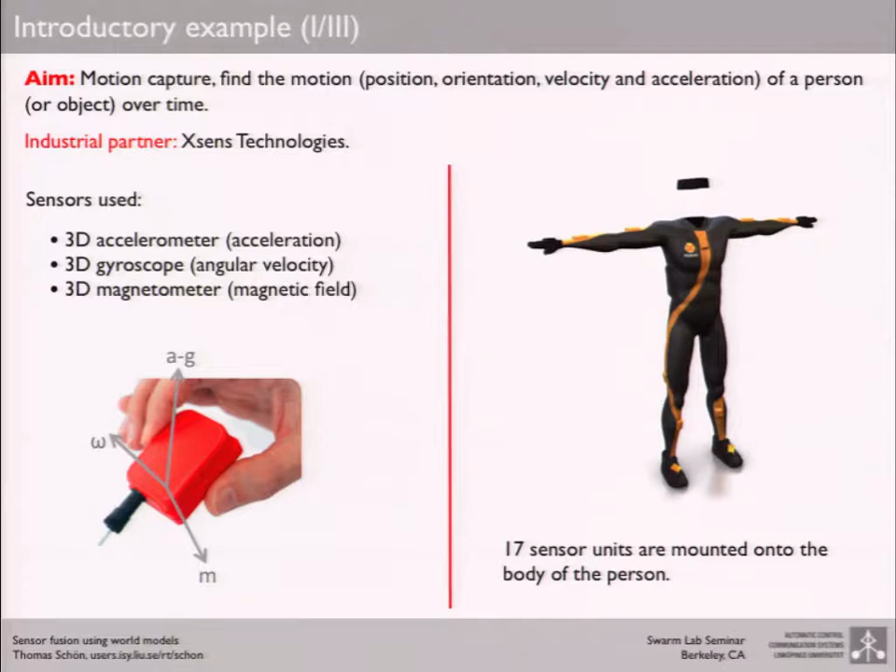Well, if you start and try simple things first, as you should always do, you only make use of the inertial information. We're not using any more elaborate models. I use this as a tool to show you that models are quite useful. It's going to be a very simple world model in this example. I'll give you a few more interesting examples later on.

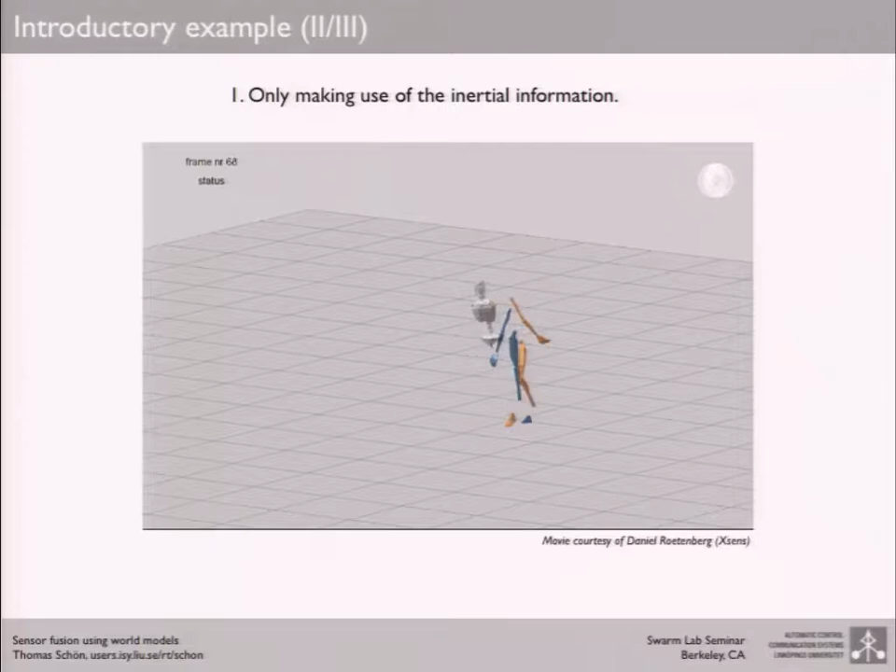So this is what happens if you, well, it's actually not what happened to this person, but this is what happens if I just use the inertial information and just try to do my best at figuring out what happens. Let's see how we can do this better, because we have quite a lot of knowledge of this system. In fact, you're all this system. I mean, you have a body, so you know that your hand is attached to your arm, there's an elbow and an upper arm and so on and so forth.

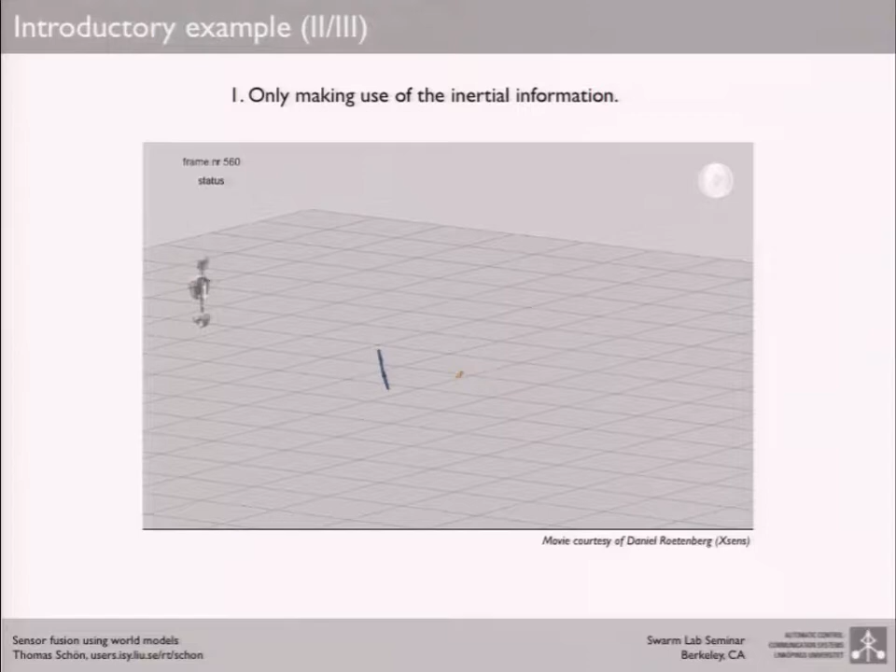So let's use that. We make use of a biomechanical model, just explaining that, and see what happens. So we now have the inertial sensors and biomechanical model. Okay, so it starts moving around. At least he's not exploding, so that is good. However, he is sinking through the ground, so that is still a problem. And why is that happening?

Well, the inertial sensor is a relative sensor. It gives you no absolute information whatsoever. And these are, as was discussed earlier, they cost a bit, but they are still considered cheap if you compare to military-grade sensors. That means they will drift pretty quickly, as you just saw. So how can we fix that?

Well, we know that I'm walking on a floor here, so I will probably not sink through to the other floor. So let's include that in our model as well. That serves as a very simple first world model. It's just a flat ground. We do that by detecting when you have zero velocity, because when you're walking there's zero velocity at certain points. Well, that's a lot of information that can be used.

So we use that together with the world model, and now it's looking better when it's moving around. You don't see the absolute position here. So this is actually not perfect either. I mean, to your eye, this looks beautiful because that's probably what happens. But the position will still drift off on the surface here.

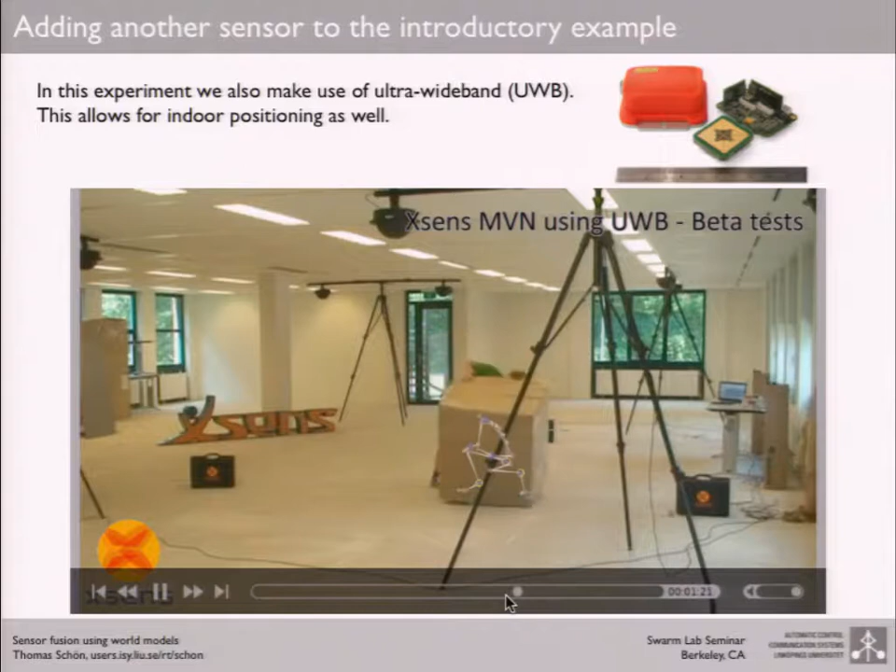Okay, so that was just to get started to show what type of problems we're talking about in a very simple setting here. So what's this? This is what I refer to as sensor fusion. So that means you have multiple data coming in. Here, it's not too much, but still a fair bit. You have 17 units, each reporting 9 signals, 17 times 9. The inertial sensor is coming at 200 hertz here, I think. So it's a fair data stream that comes in that you need to do something clever with.

And then you need a systematic way of processing that. So what I showed you here, I hope I showed you that making use of models for doing this makes lots of sense, as you all know. So again, sensor fusion, trying to define that, I'll say it's the process of using information from several different sensors to find out what's going on. That typically means, as you saw, dynamical states, so things that change over time, but also possibly static parameters that might be there. So again, you have a bunch of sensors and you have a world model.

The world model we use here was very simple. I'll show you some more interesting ones soon. You need a dynamical model explaining what's happening, the dynamics of the thing. You need a sensor model that explains how the sensor measurements talk to the dynamical model, how your measurements are related to the state. Once you have all that, then you have a bigger or smaller inference problem that you need to solve. So you need an inference algorithm as well.

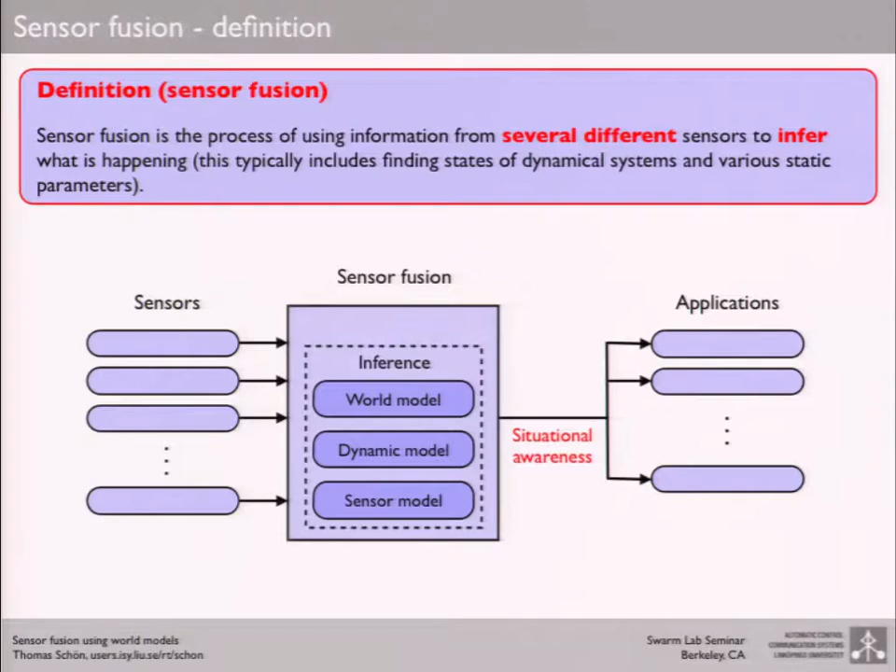Then you hand out some form of situational awareness that you then give to your customer, whatever your customer is. It could be a control system, for example, or in this case, the movie industry is using this, for example. They are happy with just getting the estimate, and then you can overlay Gollum or whoever you want to overlay.

And this, of course, just one example leads to many different questions, such as can you incorporate more sensors? How do you make use of more informative world models? As you know, we're getting better and better world models as we speak now. So how can we use that? How can we solve the inherent inference problem that we're dealing with?

It's a pretty tricky one, actually, in the general case. And quite importantly, can you do this systematically so you don't have to redo the thing all the time? Can you do this on an industrial scale, so to speak?

So before you go on, you may be addressing this, but as for this world model, it seems like this could be a difficult problem because, if it's a spongy floor, for instance, versus a hard concrete floor, is that something you think you could derive automatically from what you're observing? Is it something that comes from a database, or what's the view on that? That could absolutely come from a database, for example.

So I'll show you a bit on fighter aircraft navigation. They use a system like this to navigate. And then you can incorporate, for example, are you flying over terrain which involves lots of vegetation, or is it sea, or is it concrete for that matter? So like you said. And then you can use that in your algorithm.

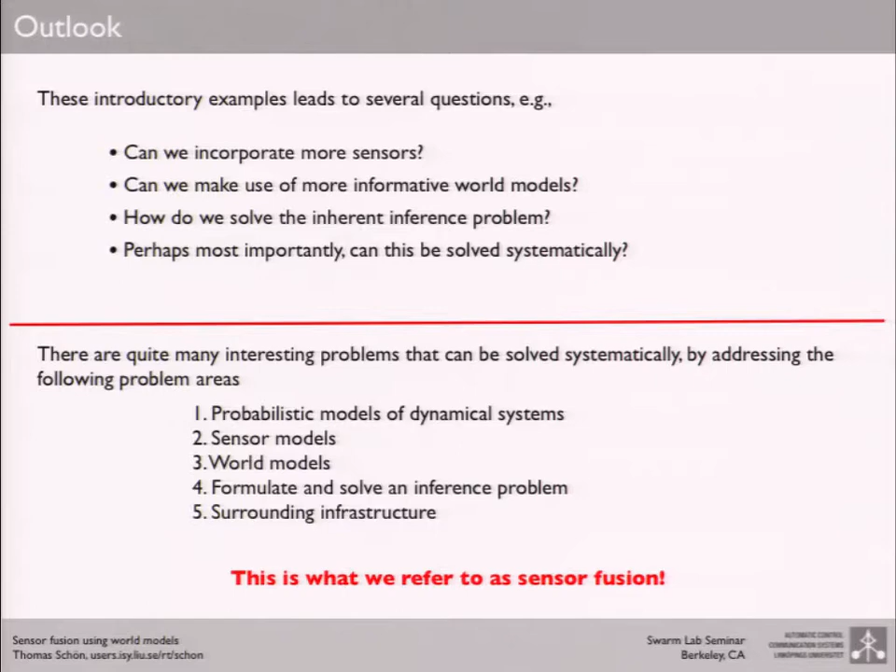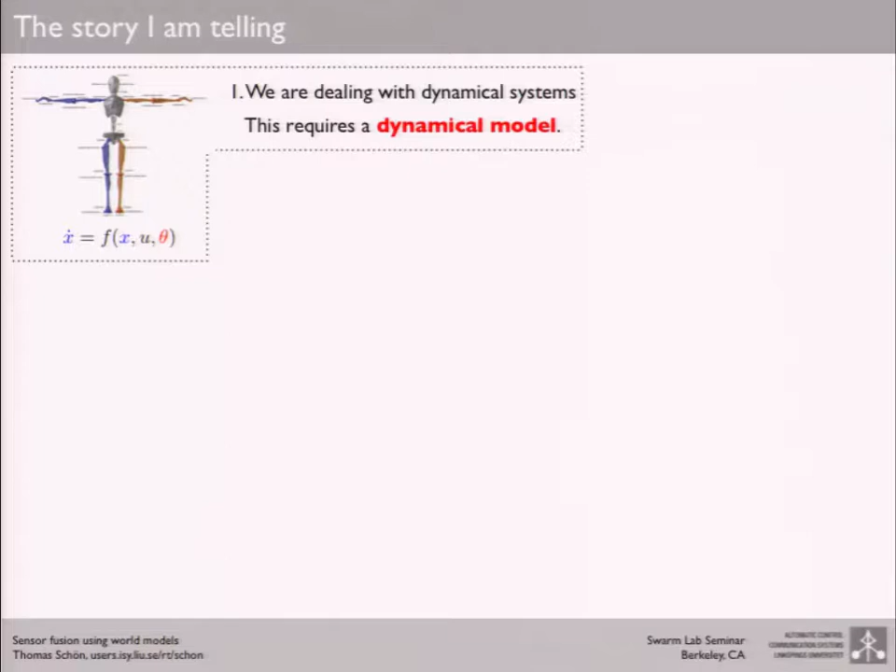All right, so the story I'm trying to tell here is, again, we're dealing with dynamical systems, so we need dynamical models. These dynamical systems, they exist in a world, so we need a model of the world. It can be very simple, as you just saw, just a floor, and it can be more involved. But we need something at least. Would the world not be dynamic as well? Absolutely. Where do you draw the boundary?

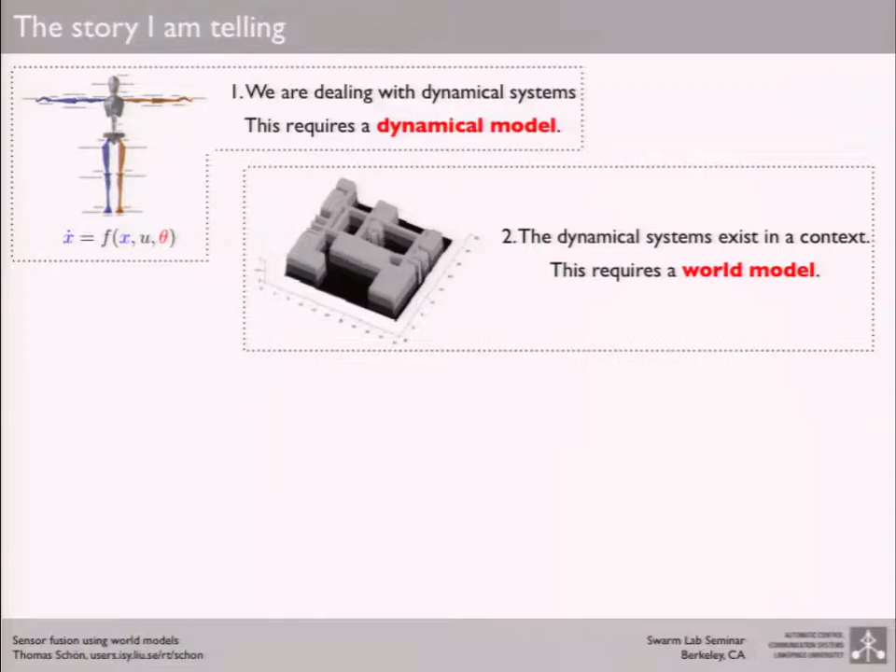I mean, you're all sitting here pretty statically, so for me, you're part of the world, so to speak, because you're not moving too much. Whereas, depends on the application. Absolutely. What is a dynamical object, and what is the world? And there's a whole bunch of research going on in SLAM, simultaneous localization and mapping, where you say, I don't know the world, so I need to find the world model as well. Yeah, absolutely. But you still need some representation of it, though.

Yeah. And then you have your sensors, and you make use of these sensors to perceive your motion or someone else's motion, or maybe both. So you need to integrate these.

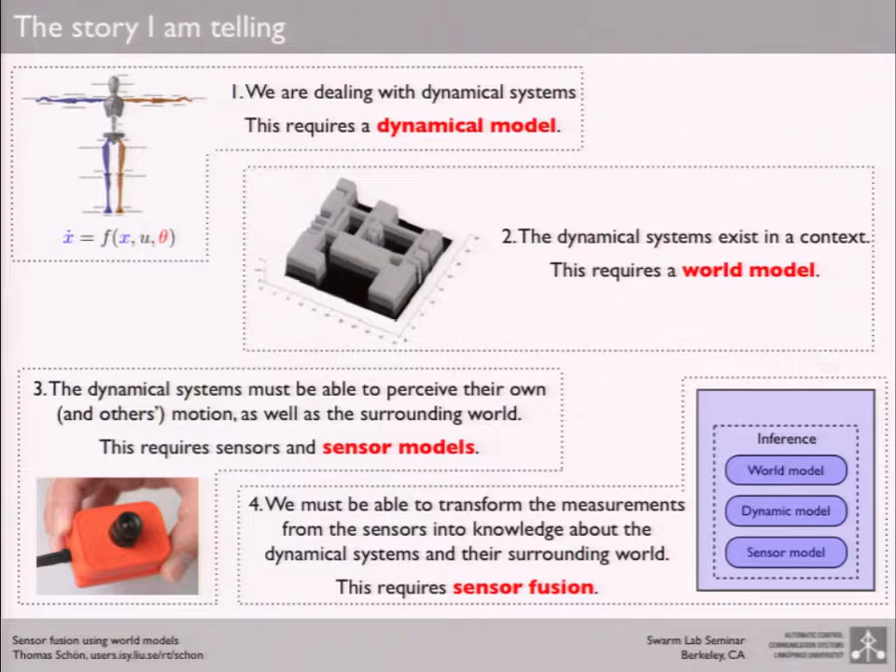And you need to be able to solve the resulting inference problem to figure out what's happening here. So this is what I'll try to talk to you about today. So in terms of an outline, I'll start with some background on sensor fusion, so I've given you something to have in the back of your mind for the rest of the talk in terms of this example. I'll talk a bit about probabilistic models for dynamical systems.

State inference using the particle filter, that's a filter I tend to use a fair bit for solving these systems. And then I'll say a few words about the Rao-Blackwellized particle filter to throw in some new technical stuff into this talk, which is a very useful technique. And then I'll talk about how do you incorporate world models that are more interesting than just the floor into these inference problems. And then I'll give you a few industrial application examples that I've been involved with.

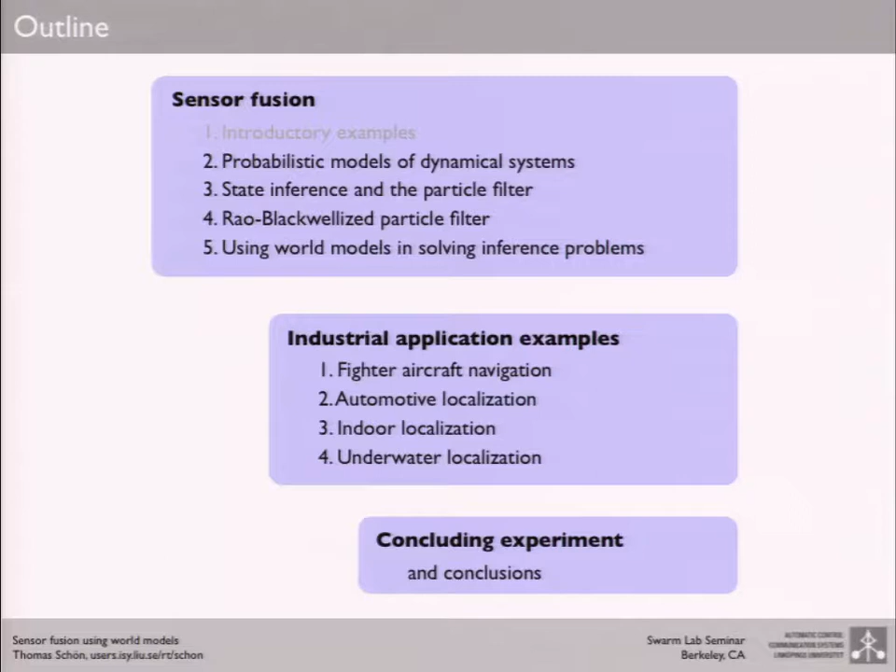So fighter aircraft navigation, automotive localization, indoor localization, underwater localization. So if you like, you go up in the sky, you do the fighter stuff up there. On the floor, indoors, we have people moving around indoors. And you go out on the street, you have the cars, and you go underwater, and we have the underwater stuff down there. And then towards the end, I'll give you a concluding experiment just to widen the scope a bit, and then conclude.

I gave a tutorial on particle filters yesterday, so I'm sorry for repeating myself for you guys.

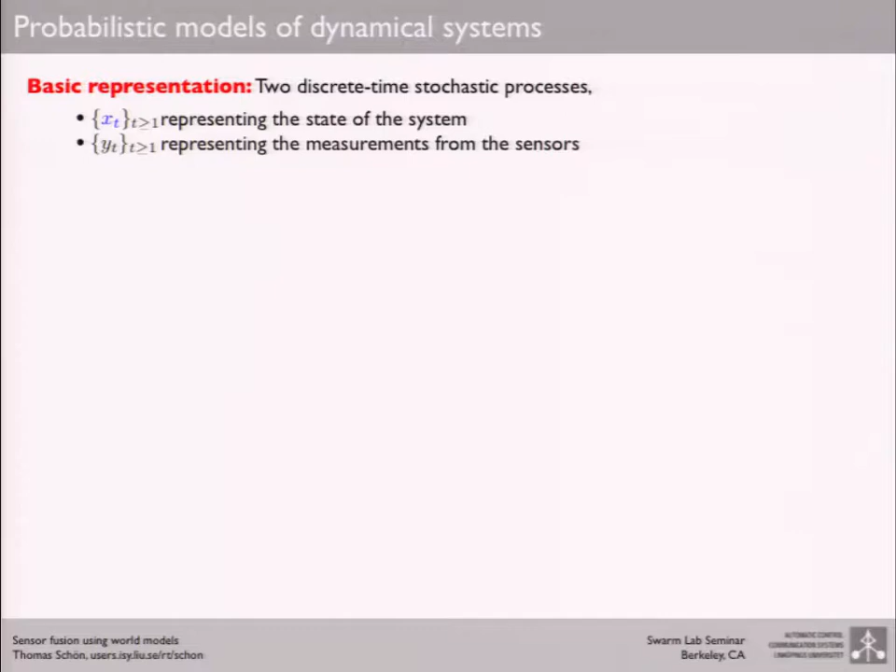The basic representation is two discrete time stochastic processes that I use to model the dynamical system. So we've got this process X, the blue, which is representing the state of the system. So position, orientation, velocity, acceleration, etc. And then you have a measurement process Y, that's your measurement stream from your sensors. And then we use a nonlinear, non-Gaussian model to describe this.

And the way we describe it, it's a Markov model. So the state at time t plus 1, given the state at time t, is distributed according to some distribution f, possibly parameterized by some unknown static parameters, theta, the red bits. Possibly you have some known input as well. Today we'll focus on the blue bits here. I won't worry about the red bits. That's an extremely interesting problem as well, but that's another talk.

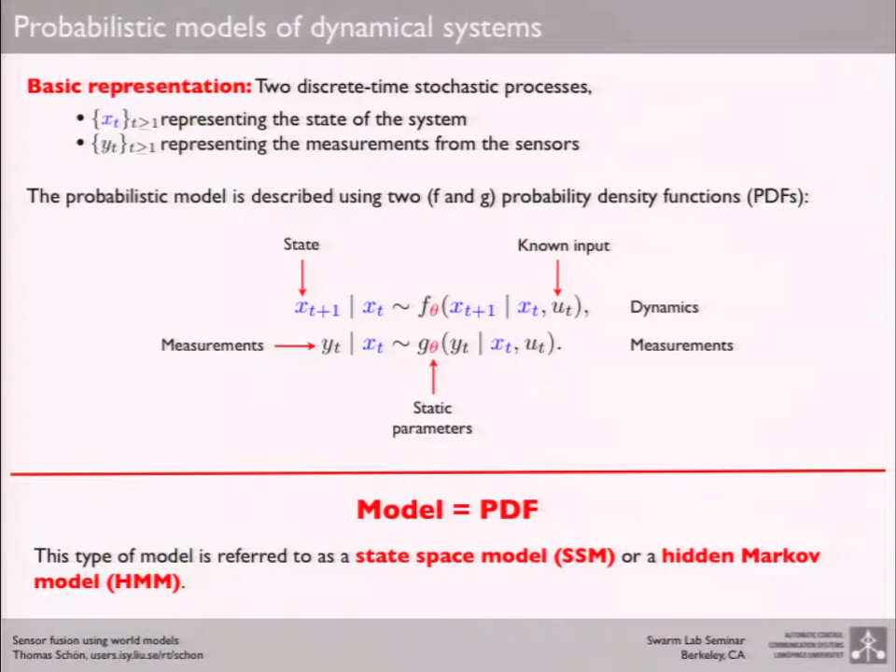And then the other model is the measurement model. Again, another distribution g that tells you how the measurement is distributed conditioned on the state. So that's the model we're going to use. So when I talk about the model, I'm talking about the probability density function. That's what I mean by a model. This is referred to as state space model, hidden Markov model, latent Markov model, depending on where you come from.

Okay, so that's the model. What's the aim? What are we trying to do? Well, we're trying to obtain a probabilistic representation of the knowledge that we have about the state based on the measurements that we're receiving. So that means a point estimate is not going to be good enough. We cannot rely on that. I will show you why soon. That's dangerous. So you need a wider representation. So one good idea is to use a distribution as well.

So looking at what I call the filtering PDF. That is the distribution of the state given all the measurements up to time t. So based on everything I've seen, what is the distribution of the state? Then from that, you can extract, if you want, a point estimate or compute confidence intervals and do all the things you might want. But that's the object we're trying to capture. The obvious question is now, how do you compute this object? How do you find this?

So I'll just derive the equations you need to solve and then see how to find it. So we're looking for this object. Using Bayes' theorem, I can split this into working with the distribution of the measurement given the state and the one step ahead predictor. And then we recognize using the Markov property that this is actually the model coming in here. That's our measurement model. And this is just the one step ahead predictor.

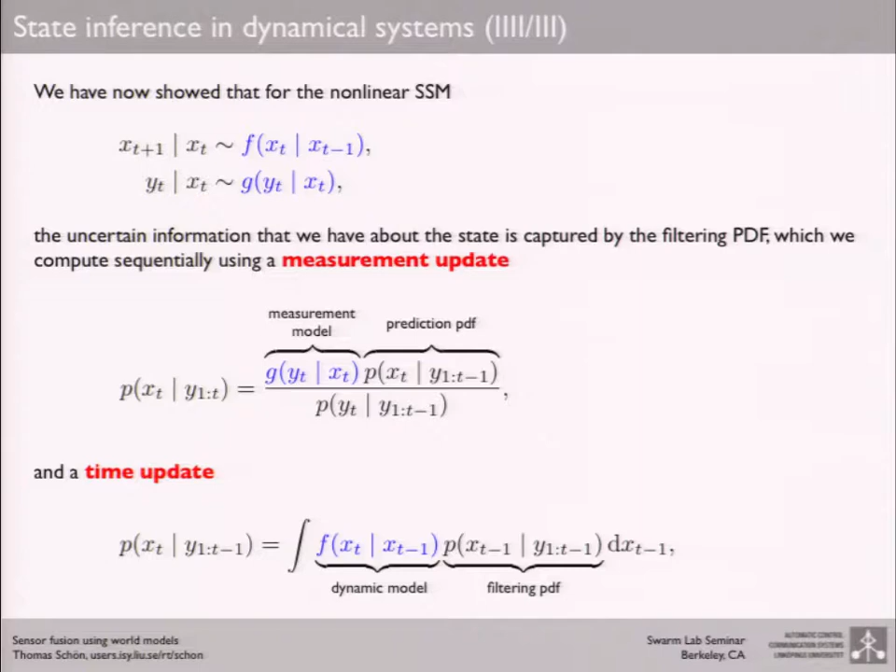But then, what do you do when you have a nonlinear model, and you also have a world model, including a map? How does the map fit into this picture? Think a bit about that — I'll explain in a second.

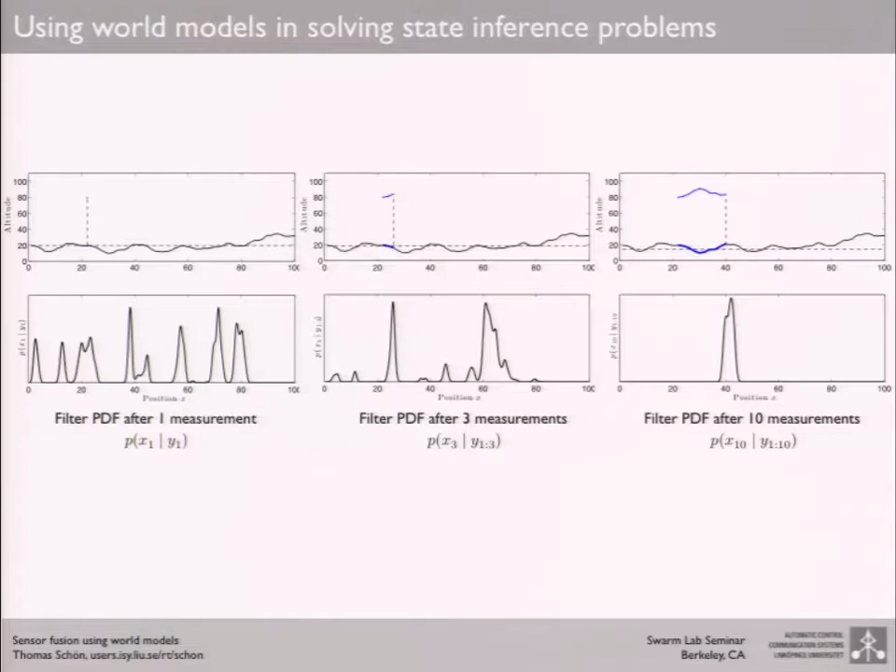So this was the most simple example I could think of to illustrate the idea. It shows you a few things. For example, this is clearly a multimodal filtering distribution, as I've said many times now. And it's straightforward to represent and work with using a particle filter. It would be horrible to work with this using, for example, an extended Kalman filter, because then you'd need a software swamp, with lots of if-then-else things that's not maintainable.

So it also highlights some of the key capabilities of the particle filter, which automatically handles an unknown number of different hypotheses that you might have. And these numbers might change over time dynamically, that's fine. And you can work with nonlinear, non-Gaussian models.

And this we've implemented in this fighter. Saab, together with Saab, we actually built this — well, not we, but Saab built this in Linköping. So we've implemented this to solve the navigation problem in the fighter aircraft. And that we did, that was pretty much when I started as a PhD student, so that was about 10 years ago now, a bit less. And if you know something about these systems, the computers that sit in there are not the newest ones, because you have security issues and all sorts of things. But it still worked — back then, it worked onboard those computers.

What this Rao-Blackwellized particle filter does is exploit a conditionally linear Gaussian substructure. That means, based on some of the states, the rest of the states will obey a linear Gaussian model. Let me explain in more detail. We divide the state into a red part and a blue part. Red is dangerous, so that's the nonlinear part. The blue part is simple, that's the linear part. If we formally define this model class, it's a class where you can partition your state into these red and blue bits. The conditional process for the linear state, conditioned on all the previous nonlinear states, will then be linear Gaussian. So it doesn't make sense to use the particle filter for those states — we can just use a Kalman filter, possibly.

But then, as Maxwell told us, the magnetic field falls off pretty quickly, cubically, as 1/R^3. So that's sad. That means if I'm here, the magnetic environment is interesting, but when I'm over here, already I'm losing it, I can't see it anymore. So that's a problem, of course. But let's see, that's just a little ongoing thing, more an idea than a result. But these are interesting as well.

Okay, let's move on and have a look at some of the industrial applications. I'm not going to talk more about the fighter aircraft, I talked about that last time, so I'll leave that.

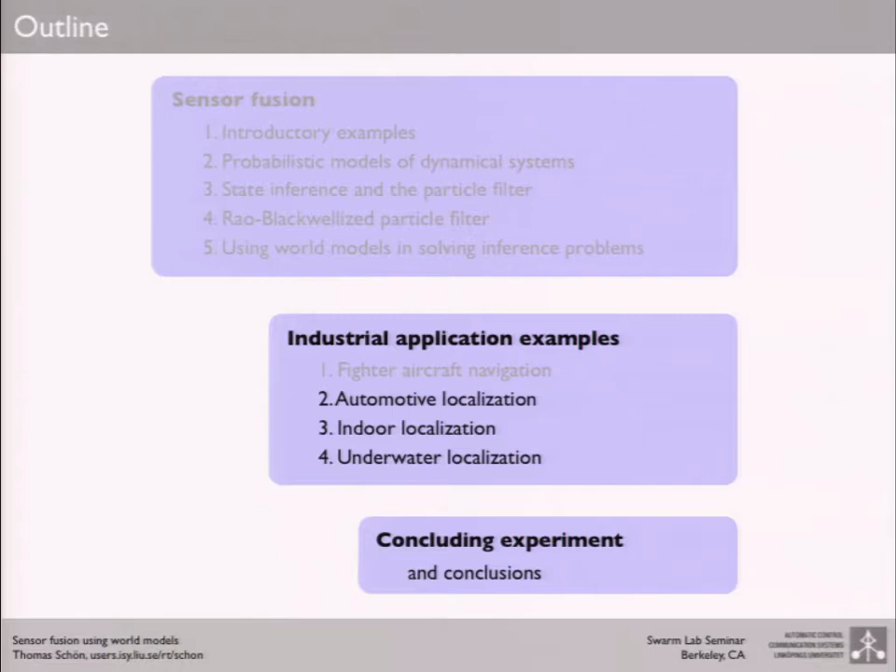Let's do the automotive localization first. So what have you got here? This is work together with a company called Nira Dynamics in Linköping, a spin-off from our group. They mainly do tire pressure monitoring, which is interesting too, measuring tire pressure to foresee a puncture so you can stop in time, and you do that without using any sensors in the wheel, just the wheel speed sensors.

Sorry to interrupt, you saw where the F's and the G's come from? I mean, you saw this map where, I think you said how you can obtain a world model from this map. I was wondering, where do these models come from? In particular the functions, since I need those to do all the computation. Yes, so as always, no one will give it to you, you need to figure it out yourself. So how do you do that?

Well, for this case, when we have a car moving around, I can write down the dynamical equations for a car moving around. That's a hard task, of course, but as always with solving any problem, try simple things first. So for this, a very simple model is enough, just a point mass moving around in space, not even in 3D since it sits on the ground. So I haven't included any of that, that's a deterministic dynamical model.

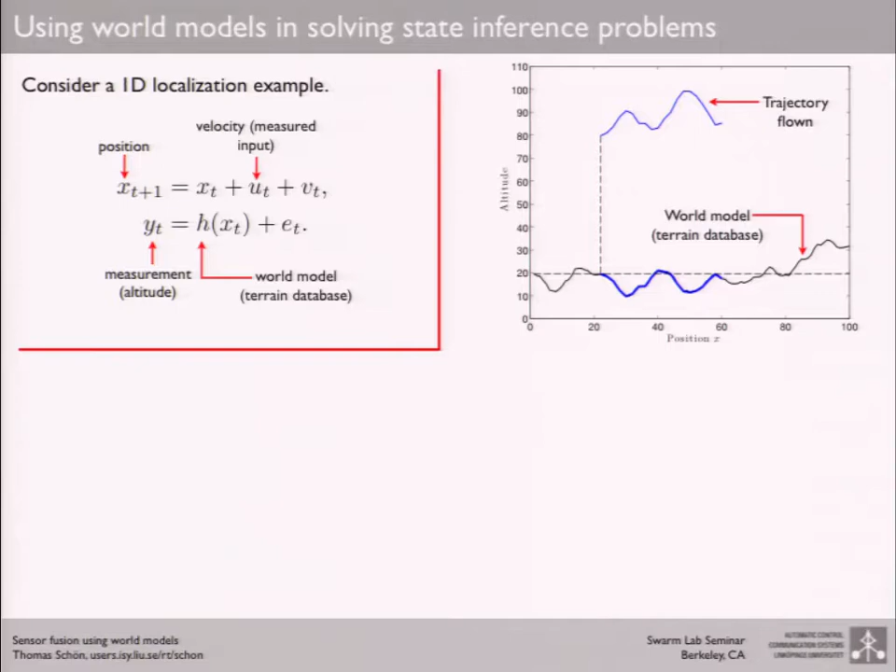So for your other question, how does the world model enter? Well, that's the world model that you have. Whether that is this simple model or something from Google Earth or the 3D models from Apple, or whatever, doesn't matter.

But you need to figure out the numbers, right? So when you say this is a road, this is a non-road, you need to assign probabilities to those numbers, the probability of a car being in the road or not. These are assumptions we need to make, which is important and hard and not obvious how to make. Because you can of course have a vehicle with the capability of going off-road, so that means there will be a probability that it goes off-road, but we can incorporate that as well.

Sure, absolutely. And that's sort of entering the art side of it, I would say, because that requires playing around with it and experience. But yeah, good question. Let's see, where were we?

Okay, so the task here is to compute the position of a car, like you say. Your GPS fails, which it does every now and then. But the road will hopefully not fail, it will still be there. And you have the map with you, and you have an accelerometer in your car, at least one or two. Soon I think there will be 3D accelerometers in cars as well. A gyroscope, you have at least one for your heading. You have the wheel speeds, because the ABS system makes use of them. So you have all of this on your CAN bus, ready for you to use.

So if I use that together with a road map, what can we do? That's what we're playing around with here. So again, a very simple model of the car, more or less a point mass moving around with wheels attached to it, but some sensor models, and the world model is the PDF that we just extracted.

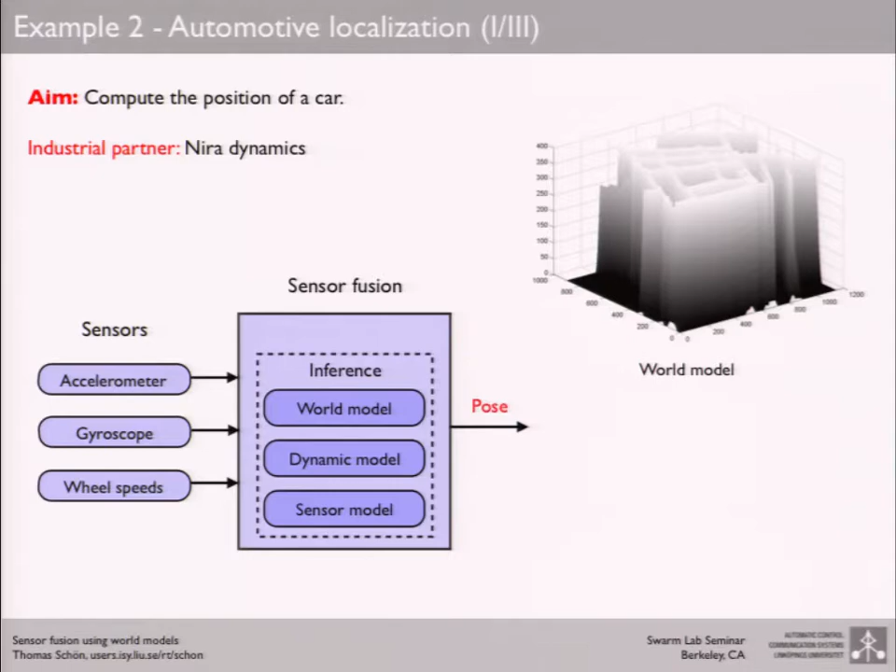Okay, so what happens then? Well, what can we do? Here's the idea: if you're driving along straight on a straight line, then I can position myself pretty well laterally, right? But not longitudinally, because my uncertainty just grows as I keep moving straight. And that's illustrated there, so that gives me a filtering distribution that looks like that.

But if I then decide to make a right turn, that is good. That's an informative decision, because then you bring information into the system. And then all of a sudden the distribution looks like that, and you're all of a sudden localized much better, at least. And then you possibly start traveling there, and it will start to elongate, and so on and so forth. But that's okay, at least I know what the uncertainty is, because I have a representation of it. So if I am uncertain, I know.

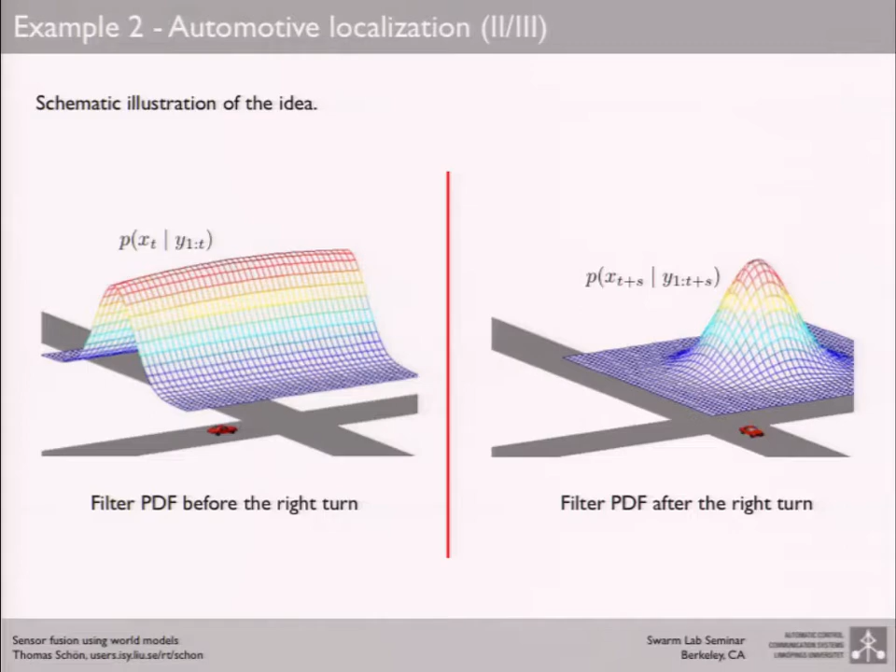So you know some of the stuff at least. We don't know the unknown unknowns, but we know some things. No, that's true. That applies pretty well here, I think. It was said in another context, though.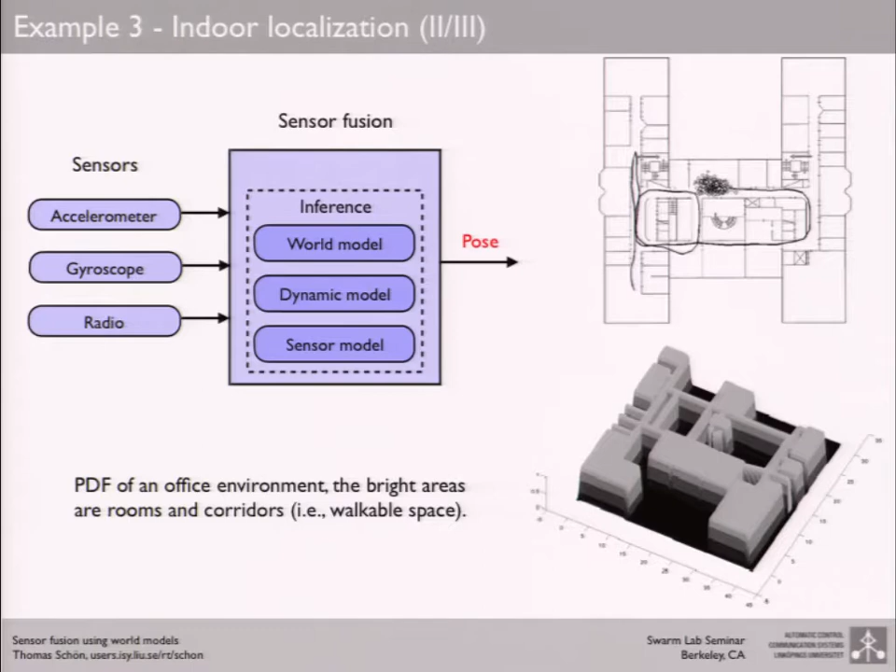What do you use the radio for? Is that ultra-wideband or...? No, that's not ultra-wideband, this is just Wi-Fi, signal strength. So that could be your cell phone. Signal strength, yeah, could be. Absolutely, you can do this on an iPhone or whatever phone.

The inertial sensors also, do you use the ones in an iPhone? No, somewhere similar. Is it like an XSens? No, this is cheaper stuff, corresponding to what you have in your iPhone, a couple of dollars. Do you know the performance, Allan variance and ARW of these sensors? Not off the top of my head. I'd be interested. So you're saying it's the same grade as what's in your iPhone? Yes.

And what grade or what manufacturer is it? I think it's Analog Devices, but I'm not sure actually. That's when I work with companies, I tend not to ask too many questions, it makes life easier to work with companies. Some things are better not to know. That helps me quite a lot actually.

Okay, so let's see what happens. Let me explain your question about the radio. The initial idea was the following: because in here you have a very specific radio environment, and if you want, you could map that, and that's a map you can then use to position yourself.

Great idea, but the problem is it's expensive to build this map, hence we can't use it. So that's why we stopped thinking about that. But we're still using the radio to initialize.

So when we start - that's my student, and the other student is filming him as he moves around - when you start, you stand there for a little while. So you just record the radio information: which base station can I talk to, can I see? And based on that, you can get a rough estimate of where you are. So we use that to initialize.

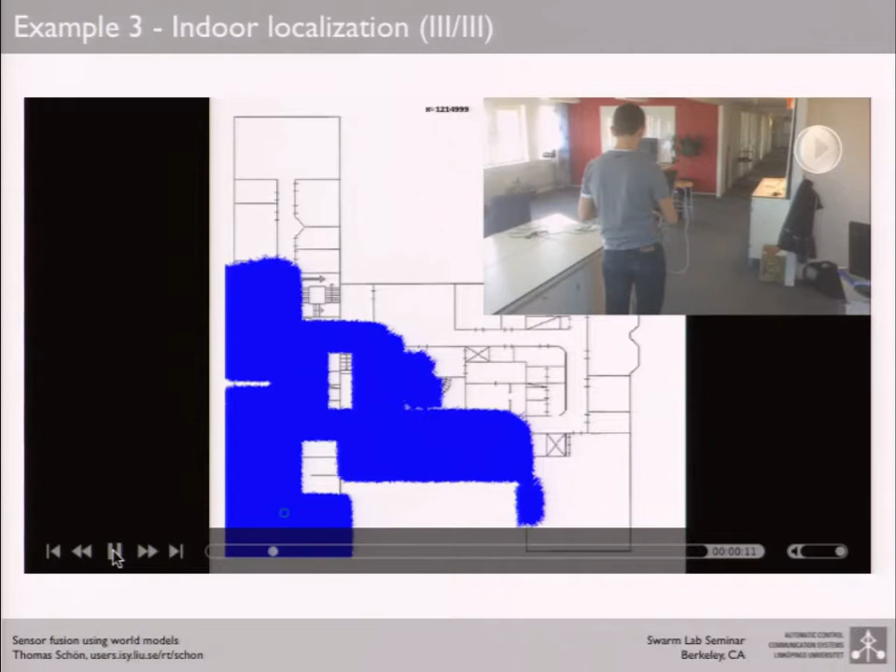And as he soon starts moving, the filter will start working. The same, you'll see the same thing. So here, let's pause here, for example. He's just been moving straight on. There are quite a lot of different places in the map where you can keep walking like that.

So not very informative at this stage. At least some particles will hit the wall, so to speak, so they will then disappear. And so far, you see it's just the snake following there - it's just the green ones, so just the true position.

Other than the initial time you used the radio - you didn't after that, because it's finished. Well, a hypothetical question: the same way effort is put into generating the basic map, can't you map a lot of other things simultaneously? Absolutely, that's an interesting question, and a natural step forward with this is to use this, because as you will see after a while here, we get the position pretty okay.

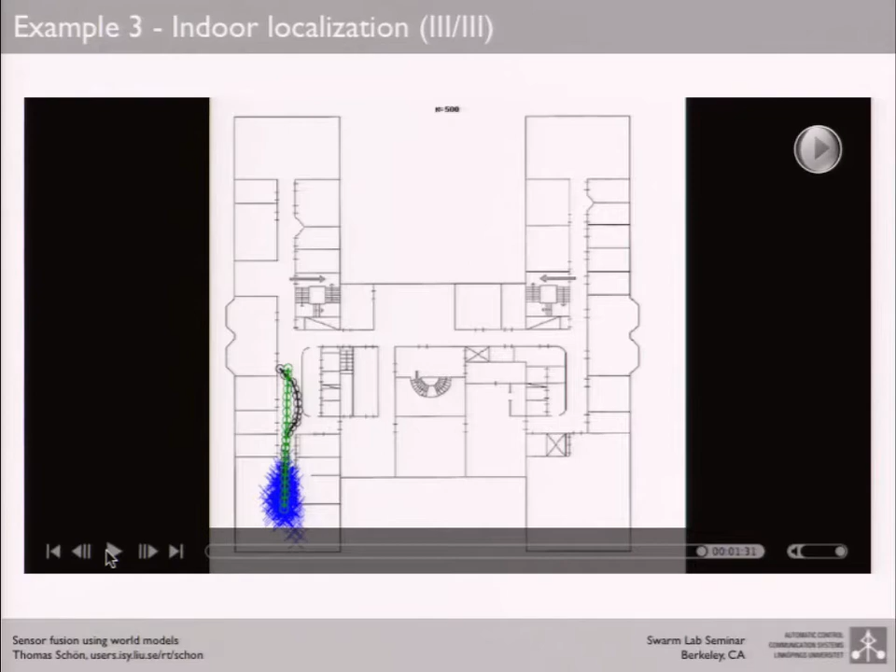The computations are not run on board this little chip. There is a DSP there, but it's not powerful enough, unfortunately. So we're just reporting the measurements to something like this that does the computations. But based on this, as you just started thinking here, well, can't you add this, can't you add that? And absolutely, we can add. That's what I want to do. I want to add more information here to get it better.

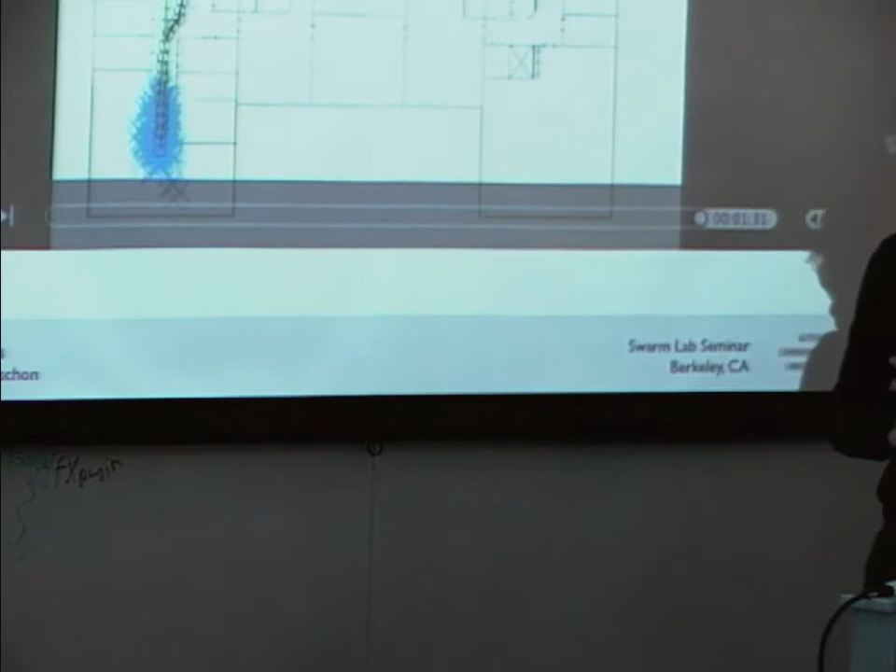Yes? Are you going to talk at all about how you actually make that determination that, yes, we can make a point estimate now? It seems like there'd be a lot of special sauce there as far as when does the distribution become unimodal? Yeah, I'm not going to talk too much about that, but it's interesting and not obvious, because as you say, how do you make such a call? But a very simple way of doing it is just when is most of the probability in one mode, and make the call then. Just as a simple start for that.

Okay, we should push on. So we've now done this in air, we've done it indoors, we've done it on roads, so let's do it underwater. So the task here is to find the position and orientation of the yellow thing here. And this is work together with another Saab company, the underwater security. I've not done this work, this is work by a colleague of mine, Rickard Karlsson. But since it fits the theme well, I wanted to include it.

So the idea now, sort of repeating myself, of course we can use exactly the same idea. If someone provides a map of the seafloor, and we're getting more and more maps of the seafloor, even though that is the part of the Earth that we know least about. But did Google do that already? Absolutely, they do that, and other people do it as well, but not the entire seafloor. Oh, okay. But we get more and more information. But as far as I've heard, we don't know too much about what's down there actually.

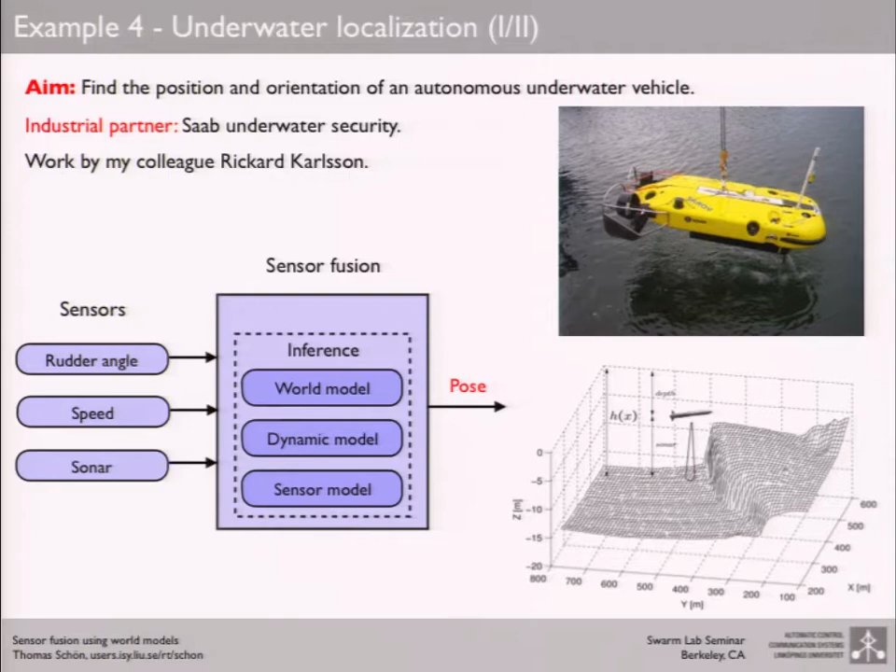So what have you? Well, you have a map of the seafloor. You have your vehicle. The sensors that you got now is a sonar that provides you with the distance, and you have a control system that you have designed. So you know the rudder angles, so that's useful, and you have speed. So again, just incorporate that. You got the world model. We need a dynamical model for this vehicle. Again, your question in the back there. Saab built that, so they have specifications for it and the dynamical equations, which we just make use of. And you solve the inference problem using the particle filter, and hopefully you get a good position out of that.

So let's pause there for a while. So what do you see here? Well, this is just a part of Lake Vättern, which is Sweden's second largest lake, actually, close to Linköping. And this is the sea floor, so you see the height. Here you have 8.5 meters. This is pretty flat area. Then you come to a drop off, 9 meters, 14 meters down here, 15 meters, etc. So you can visualize what this is. And then you think about this map. Given the idea we're using, that means over here, this is not good. That's not informative. That's not helping us.

This is helping a lot. That's extremely informative, or exciting if you talk about estimation problems. So this is the initialization. It might look strange, but given the system, you have a sonar, so you measure, you get a depth, and you just initialize particles uniformly in the map on that depth.

So that's then going to look like that. And then the black curve is the ground truth. And then we start moving, and you can see as we move more and more, the distribution gets more and more focused, as you would guess. And as you move over the edge, I think you agree that that is what you would hope to happen,

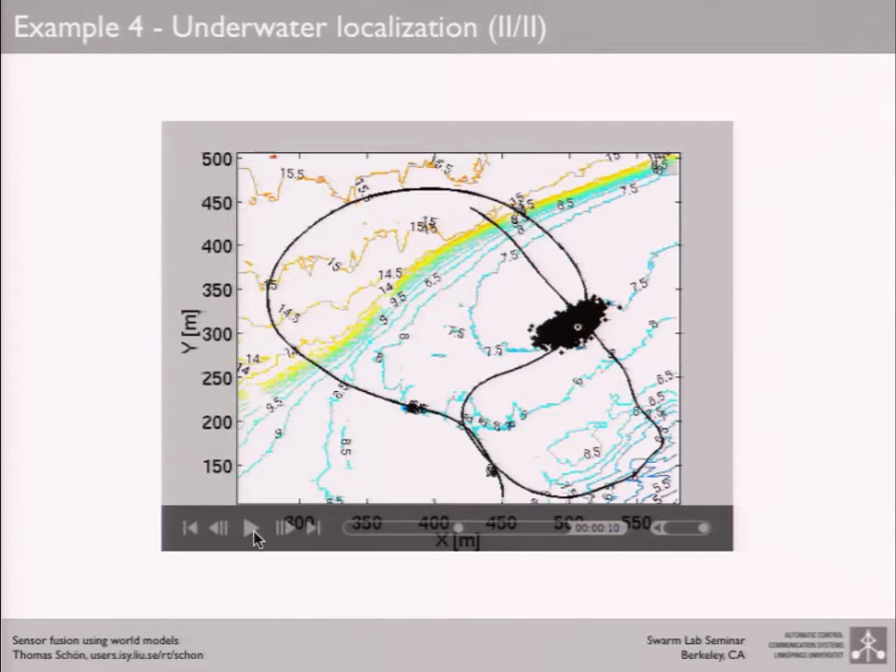Okay, so let's finish with an experiment which is stressful in a sense. So let me explain what I mean by that. So what is the task? Well, the aim here is to keep track of and discover vehicles that travel on road. So it's target search and track. So search for targets. You have no idea when they might come in and when they might disappear. What you do know is that they will follow the road.

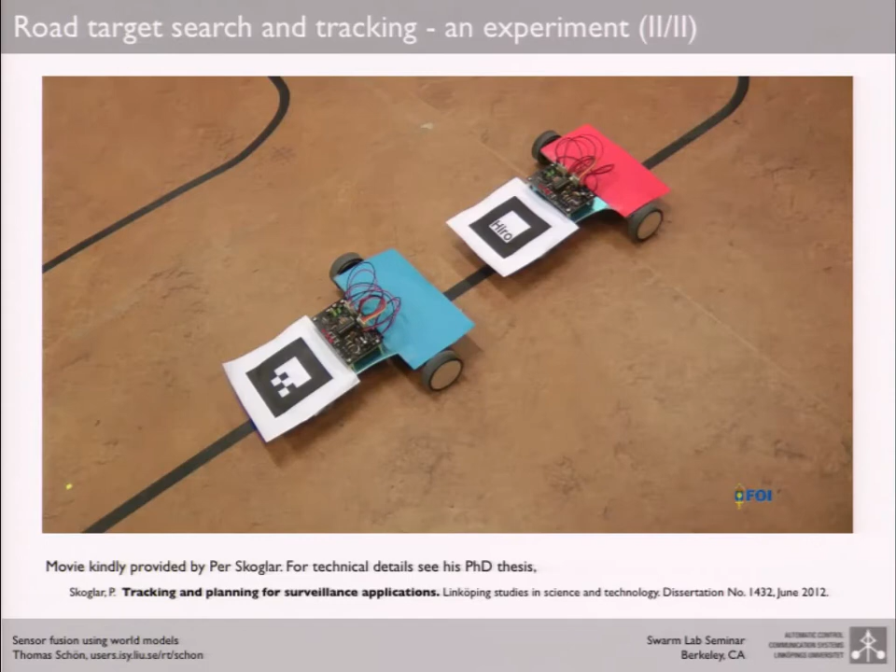So that's the setting. So it's a little toy example that some of my friends in Linköping did in the lab. So let me show you. Before I'll talk you through this, but that's rather boring without seeing what the full picture is. So let's see. I'll use this to explain the setup. So this is the camera, a gimbal camera that sits in the ceiling.

This is the map. This is our world model, so road network. These are 2 targets traveling around. Each of them, as you saw in the beginning, they have a little thing here to take away the computer vision part, so that makes computer vision very simple. So it's very easy to just detect them. This is the view, and that's the view from the camera.

And when you look at that, you see that this little camera can't see much of this world. And we give it a pretty hard task. We give it the task of, you should search and you should track all objects that are moving in this world. That's going to be a bit stressful for this unit. And then, of course, that's a mechanical thing in there, so you can't move it arbitrarily. You need to respect the mechanics as well.

What you see here is the algorithm's view of the world. So you see the footprint there, what the camera sees, and you'll see particles that represent our knowledge about these targets. So let's see what happens as we play. So if we pause there, you can see the camera is now looking over here, where this one is. That's what the camera sees.

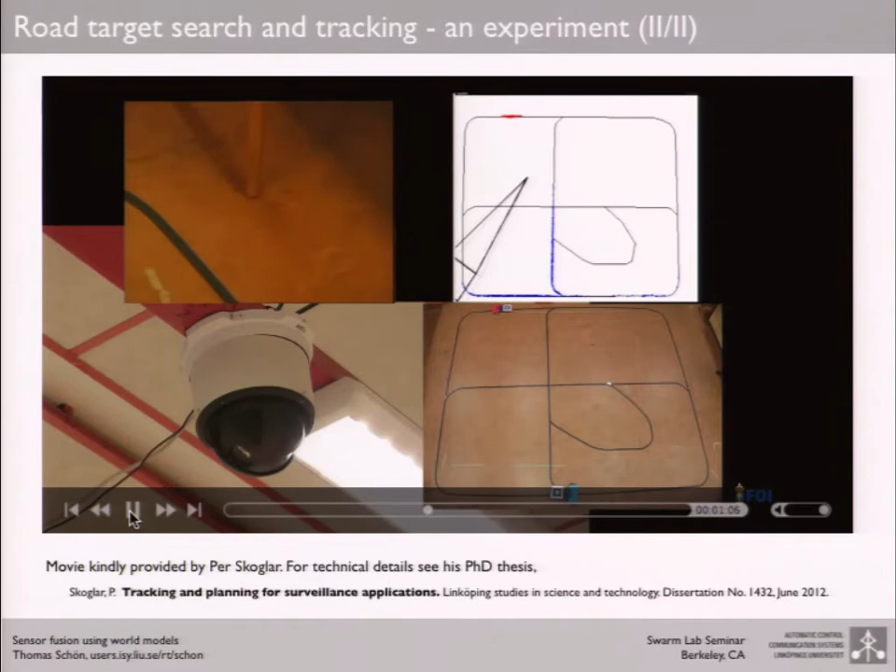But I think this is an interesting problem, because this widens the scope a bit. It's not just computing the position and orientation anymore. It's also making decisions. So you need to make decisions.

If your particles have 2 modes now, how do you decide which one to go back to? Then I would first revisit the one with the highest probability. I see. And then if I don't find it there, I'll go to the other one. Yeah.

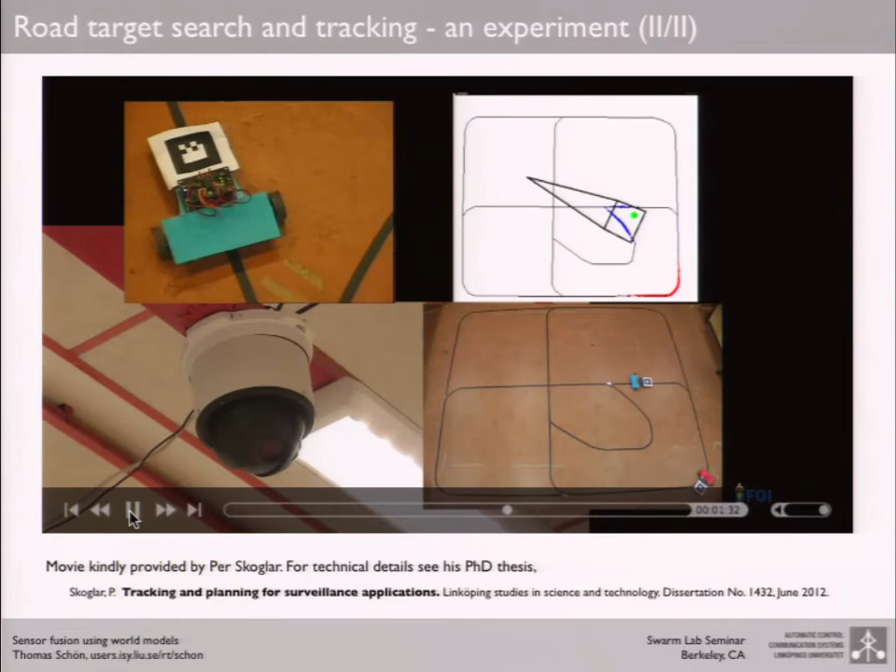So you assume a certain speed for the dynamics of your camera as well. Yes. The camera can't be infinitely fast. No, and it can't make arbitrary motions either due to the mechanics in there. Sony PTZ, it's a PTZ camera, right? Yes.

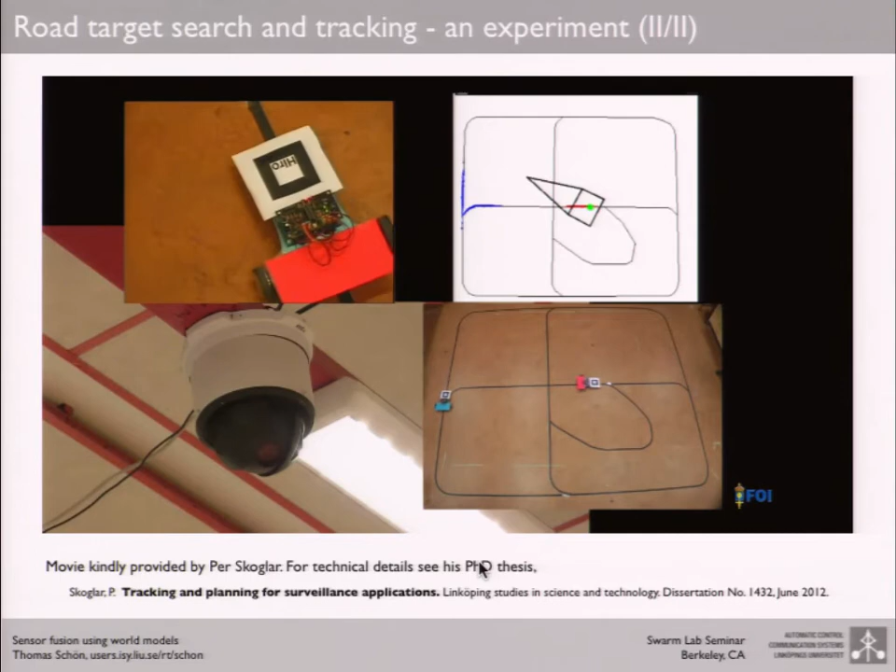Something I would like to do, I do some work with UAVs, is to replace this with one or two UAVs solving the same task. To make it a bit more interesting. So that's something I hope to play around with.

Okay, we should finish off here. So the story I hope I've been telling is: I showed you quite a few different applications from different areas. All of them were solved using exactly the same underlying sensor fusion strategy, where you model the dynamics, you model the sensors, you model the world, and you solve the resulting inference problem.

And we should not forget about the surrounding infrastructure, which I've only mentioned, I haven't showed you that. But issues like time synchronization and calibration are a problem here that needs to be respected and solved. There's lots of interesting research, and as you all know, the amount of sensors in the world is skyrocketing at the moment, so this stuff is going to be more and more important, I think. And I see that a lot when I talk to my friends in industry. They get more and more interested in this.